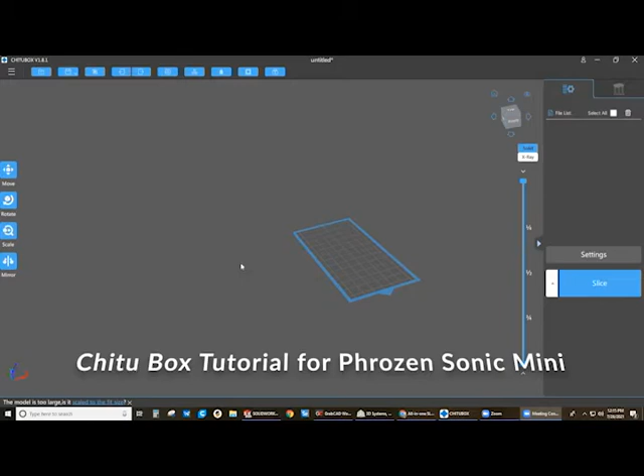Going to show how to use Chitu Box, which is the slicer for the Phrozen Sonic Mini, and then any other off-brand SLA that we get. So open up the slicer and you'll be greeted with this. From here, you're going to go to the File Explorer tab and find your files.

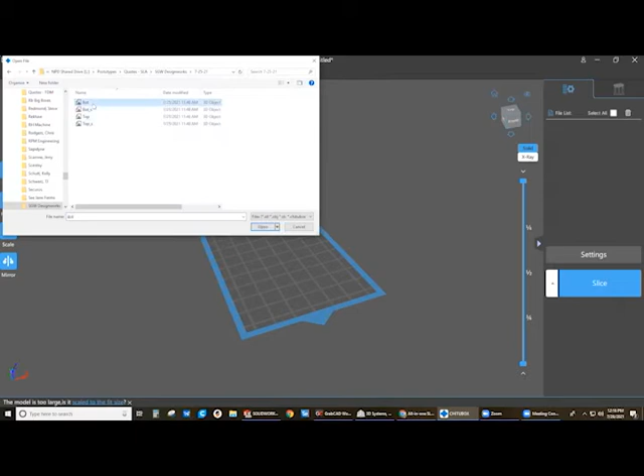Under prototypes, or where are they at? Okay. It's SLA. SW. I don't see an SGW under quotes SLA. Oh, there it is. Sorry. Okay. It's all of these. Nope. Nope. Nope. Okay. It's under a different. Oh, this one. Okay, so it's these. These two. Okay. Oof, yeah, those are small. Might as well just print all of them and see how they come out.

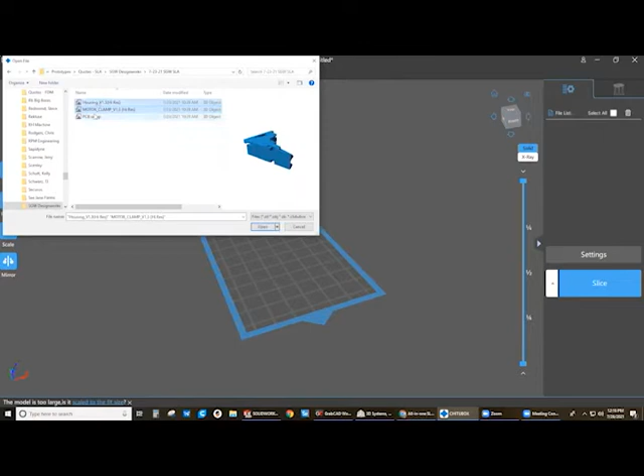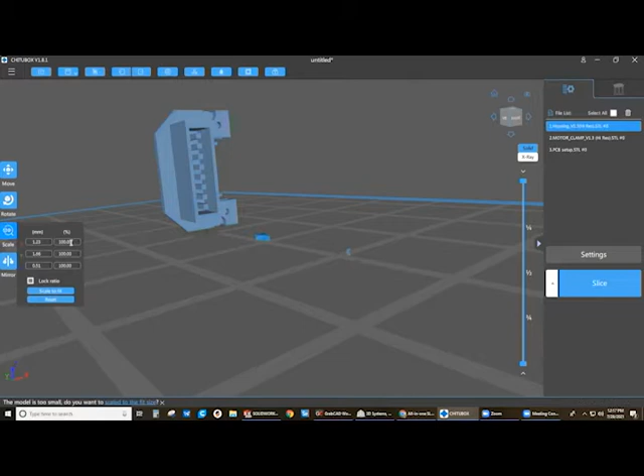So once you have them opened, okay, so for some reason, they put them in the wrong units. So if you go like this and you hit scale, you can say it'll be by 2540. Make sure that lock ratio is on. So that's just your scaling factor for inches to millimeters. So we'll get these all clipped. This one.

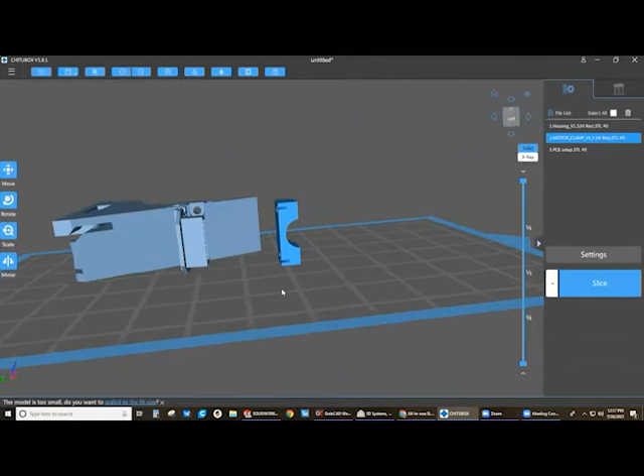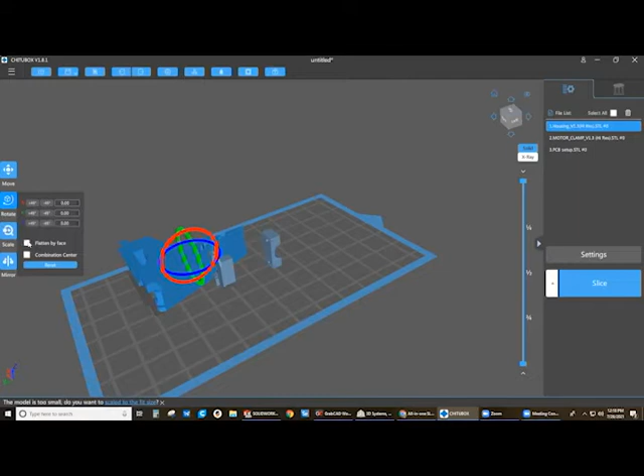Okay, so now from here, you use the right click to rotate, you hold down the mouse wheel to pan, and then the left mouse button locks onto the platform. So from here, this printer really likes to print with stuff face down or flat. So if I was going to print this one, I'd probably print it down on this face. So if you go to rotate, you can either flatten by face or you can just free rotate by these wheels, but I'm going to flatten by face and select triangle. So I'll go ahead and do that for these.

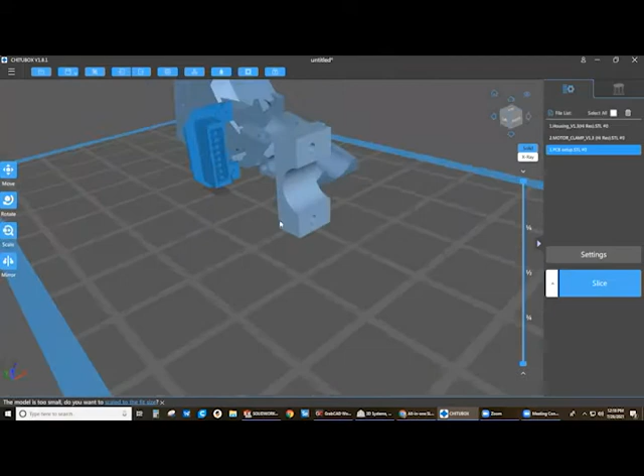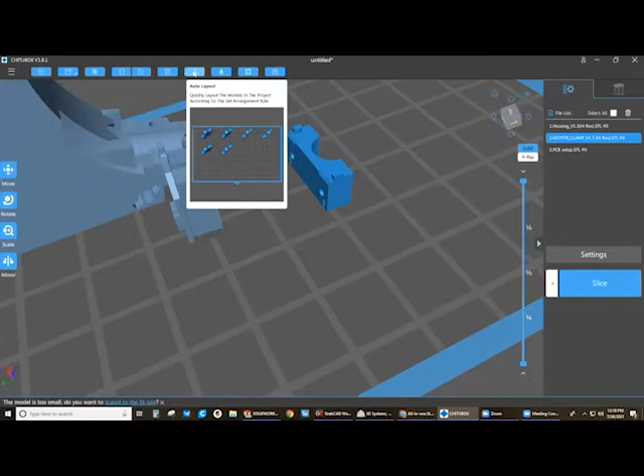I'm a little bit worried about these nubs. So if it's not perfectly flat, it's going to have a hard time printing. So for this one, I'm going to do the same thing, flatten by face, just select that face. So I feel pretty good about those two. Up here, you've got save, screenshot, like Control Z, copy if you want more than one. This is your auto layout. So if I click this, I can just go, about center. And you can set your minimum distance and everything else.

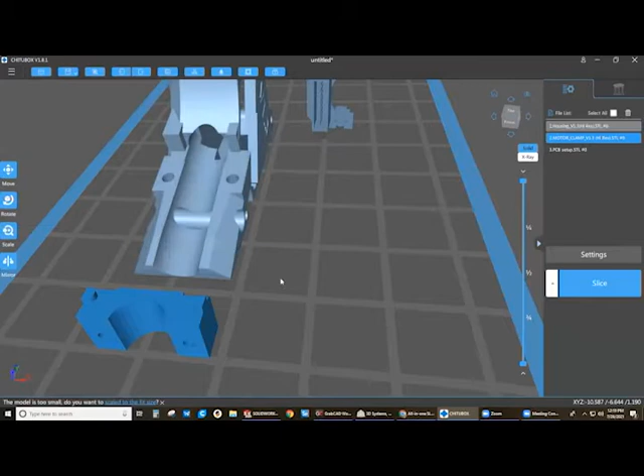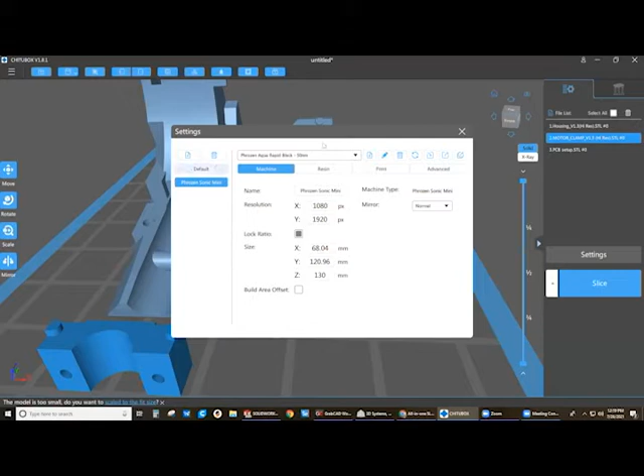Wall thicknesses, if you do want to hollow them out, just remember that you're going to have a hole in order to do that. But it does have these super cool little windows. And then from here, so this is how you get the parts in. To make sure that you're using the right printer, you'll come over here and you'll go to settings. And this is the only one that we have. This is the Phrozen Sonic Mini Rapid Black. So we just want to make sure that all of these settings are set up, and each resin is going to have its own, and then you can add different printers over here. So that's already set. We've got our parts in here.

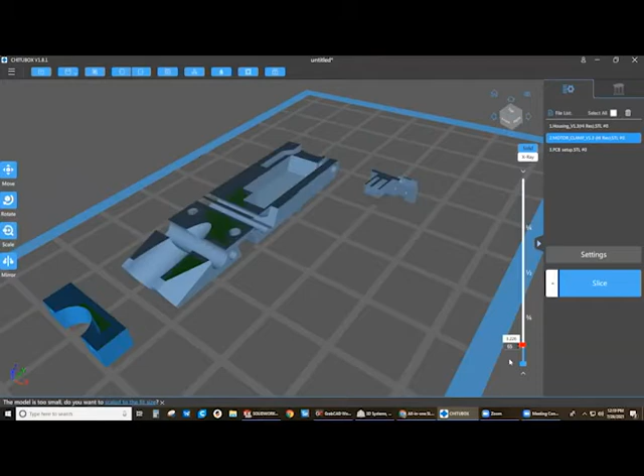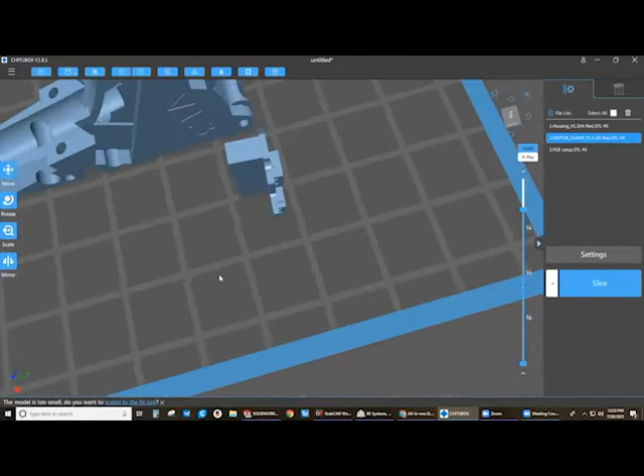These two are oriented the way that I would put them, because this one's just begging to be printed flat like this. But if we scan through these parts, you can see that anything that creates like an island would theoretically need to be supported. So like on these parts, on the two left parts, I forgot, so you can't see me pointing, we really don't have any islands that are unsupported as we work our way up. So I wouldn't put any supports on either of these, but this one is definitely not the case.

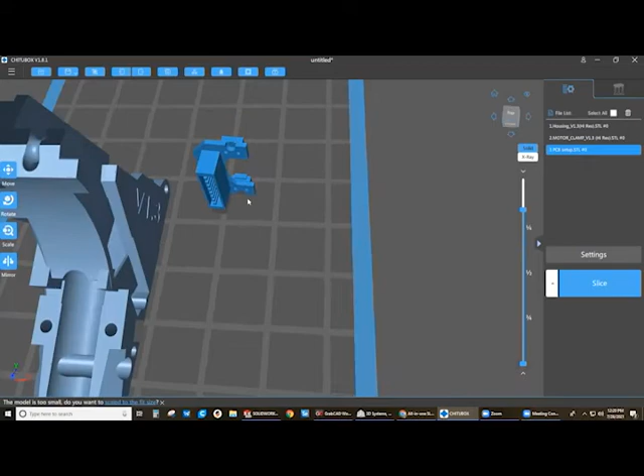So the parts on this one that are going to be really hard to print are going to be these pins on the inside here, which is insane to me. It's like they're trying to replicate, oh, I see what they're doing. They're trying to replicate a PCB is what they're trying to do. So if those pins don't work, I'm kind of not afraid. It's not going to be the end of the world if those pins are broken. And to be honest, if I wanted to make this part easier, I would just lay it flat on this face and print it without that whole connection. But they're probably trying to check fit.

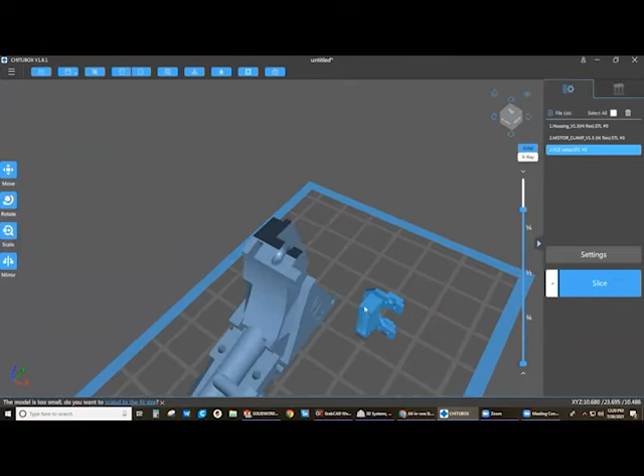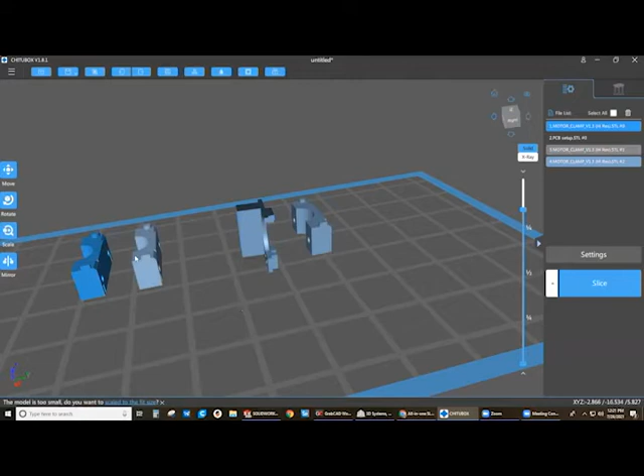So I'm going to remove this print because we already have good versions of that. So I just selected it and hit delete, and we'll just print these. So I'm going to go ahead and make a couple copies of this one. How many did they want? 3 each. So let's just make a couple more because this printer doesn't really care how many we have on here.

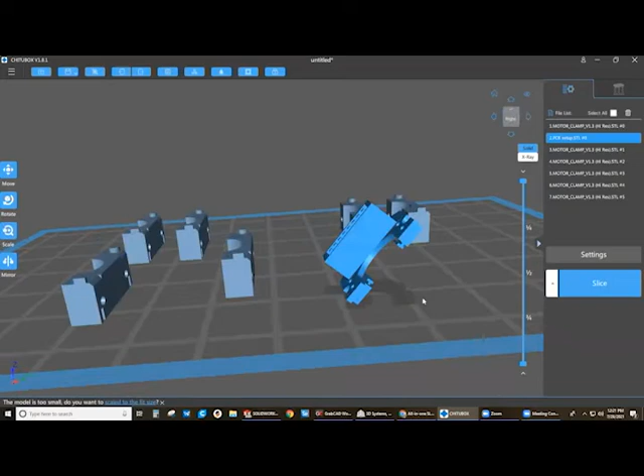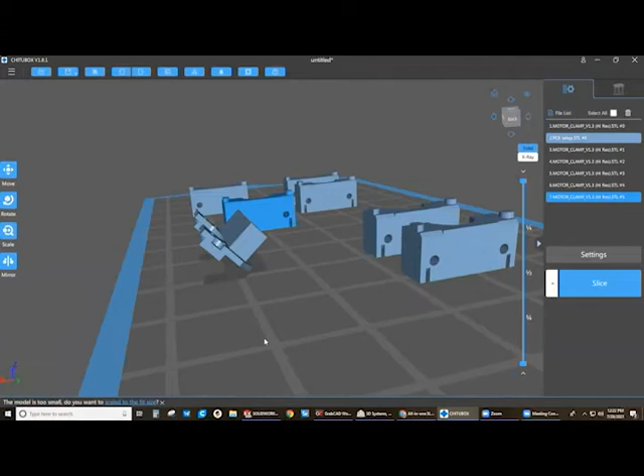So this one. So if I go like this and I click on this rotate, we can kind of see what we're faced with. Print time is dramatically affected by the overall height of the part. So if I was really worried about it, I'd want to print it as low as possible. But I think what I'm wanting to do is get it relatively flat to the bed and then rotate it this way, like this. So that way everything's kind of being built off of an angle.

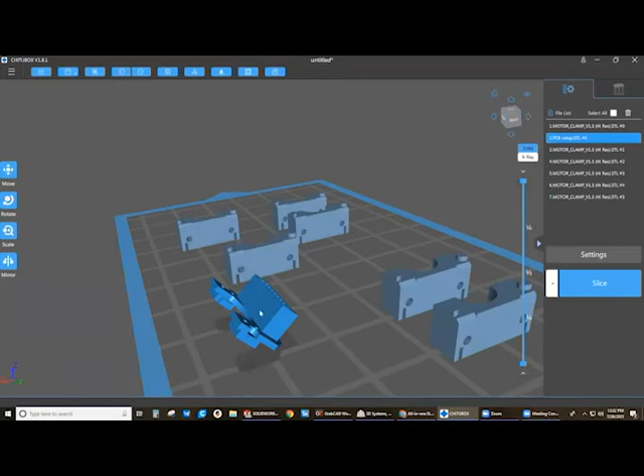And nothing, besides these little points here, is really floating. So if we go to my support tab, the support tab will work on whatever is selected. So if I go to the support tab over here, it's automatically lifting the part up in the Z, which definitely does not need to be that high, but there is a brim on here. There's like a little skate, is what they call it.

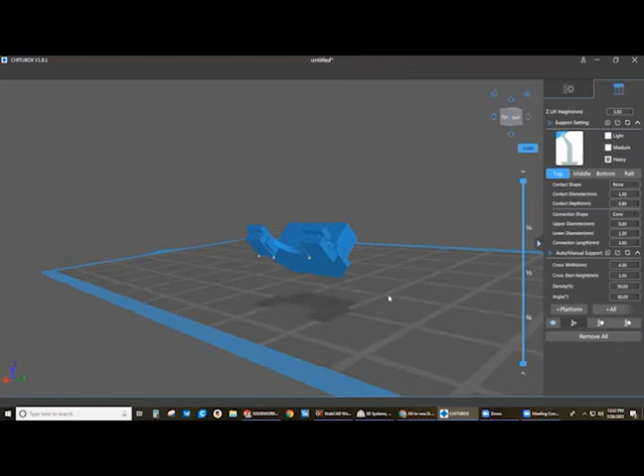So we have light, medium, and heavy settings. Always use heavy with the Phrozen Sonic Mini because of its low exposure time. But again, I'm going to just bring that as close down as possible. And I'm just going to hit all and see what it does.

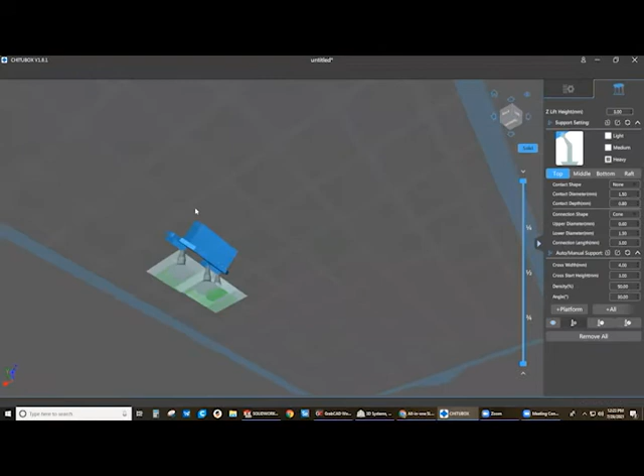So for some reason, it did not want to support anything down here at all, which is really strange to me. So what I'm going to do is go up underneath it so I can see what I'm doing. And I'm just going to select this edge and support it in a couple different places. And so it's automatically putting those skates.

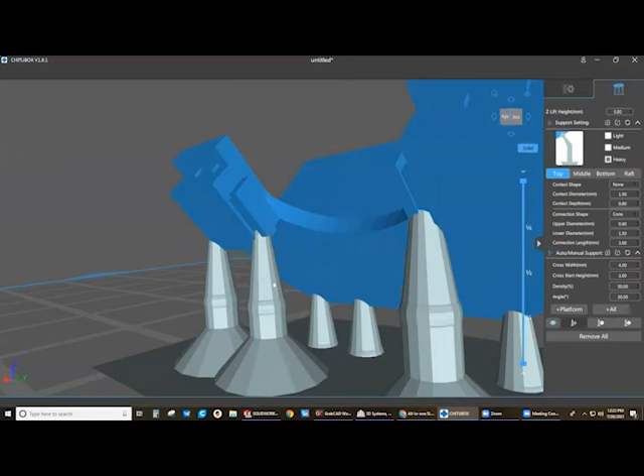And again, this is another one. So let's say I want to delete this one. I would hit over here on this delete supports, and then you select it, it turns red. And then if you deselect from that, it'll go away. So you hit select, and then you click it again and it deletes it. So I'm going to do that again with this one and delete it.

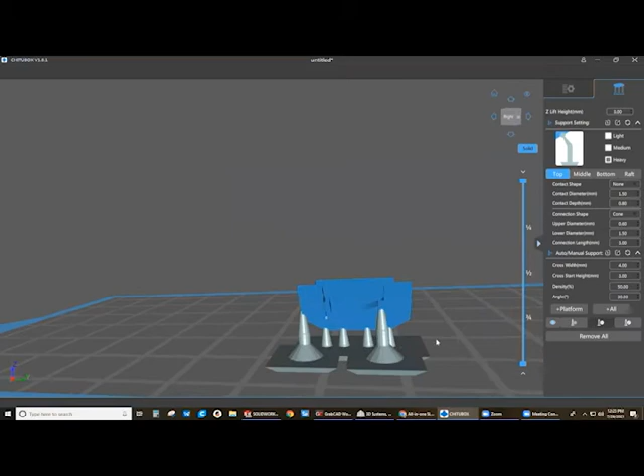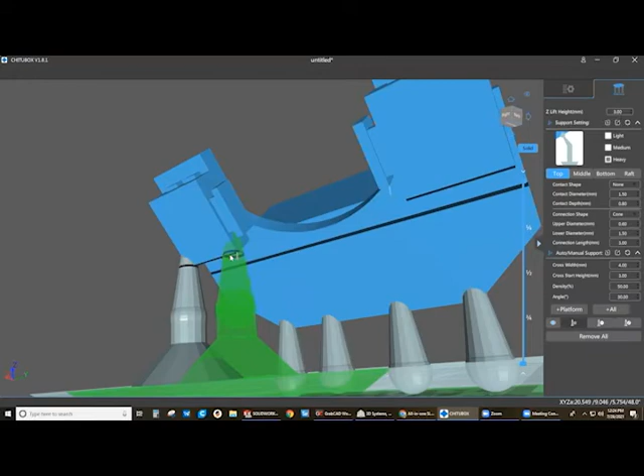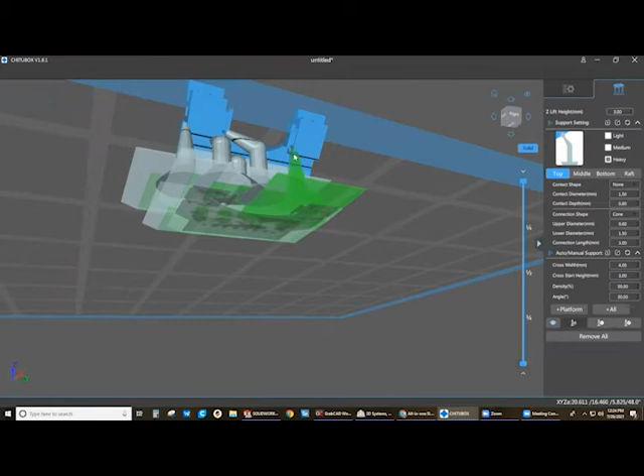So what I'm going to do here is go back to my add, and I'm going to put one that supports this point. So it's doing lots of weird stuff for me here. One that supports this point, and then one that comes off the side and supports that point. And I'm going to do the same over here. One that supports this point here and this point, and then one that comes off the center here and supports it going over that way.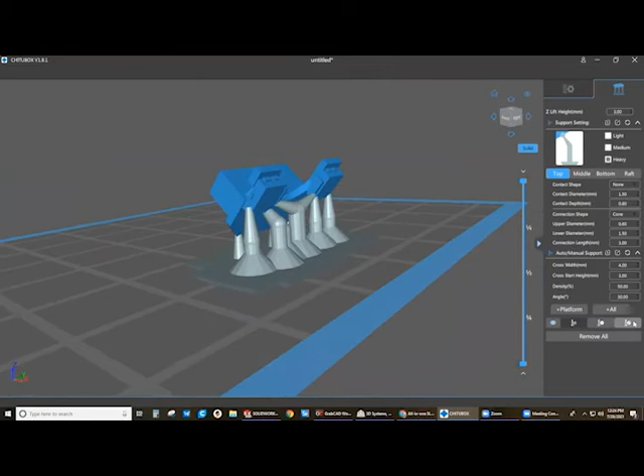It has a mind of its own, but what do you expect for a free slicer? So there you go. Kind of combine those two. And I think with the edit support, you can actually physically move this stuff in and out of the way or drag it down. But again, you don't have to get too crazy. So that's how I'd run those.

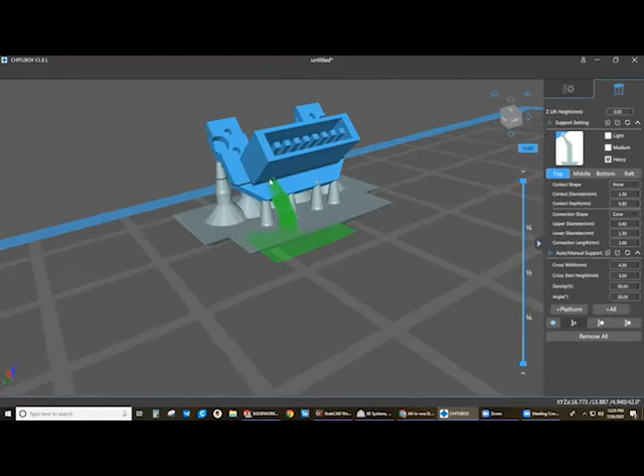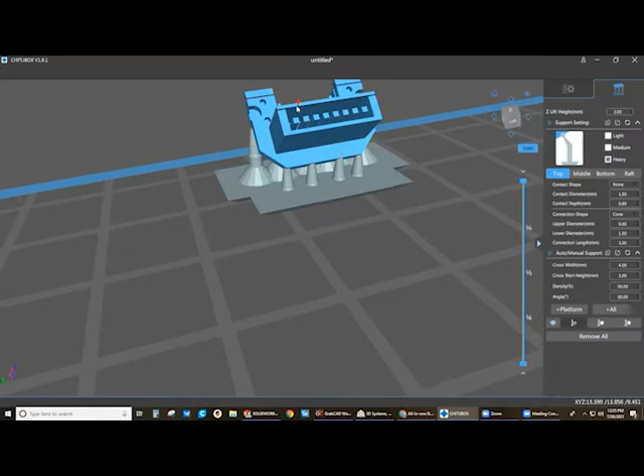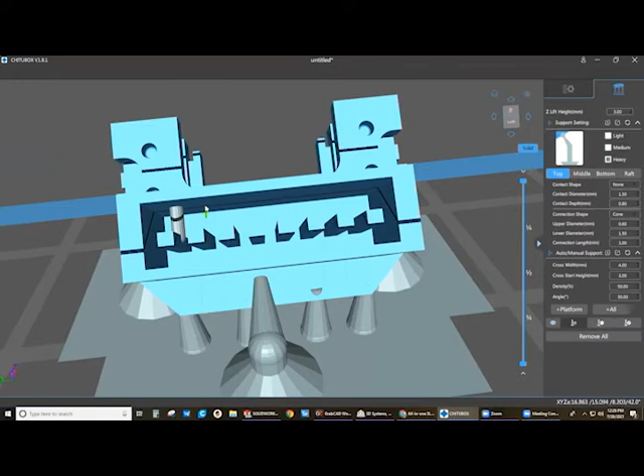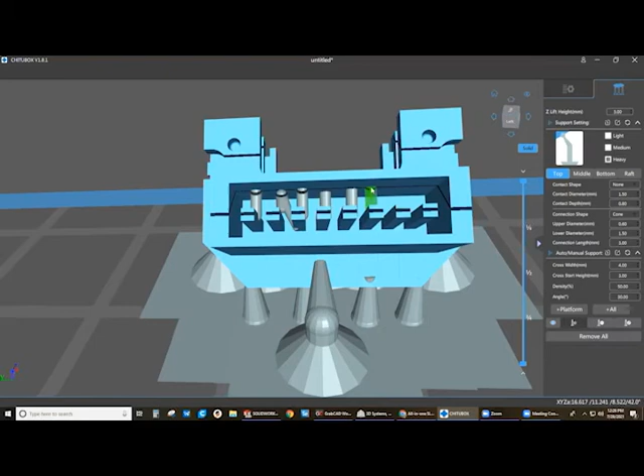If we really wanted to, we could zoom in on this and try to add some supports in here. What I want to do is put in one of these little guys. For some reason it will not let me. It's trying in some spots. You can see it kind of glitch. So it's trying to work here. I don't know why it's having such a hard time letting me put these in here. Need to delete that one.

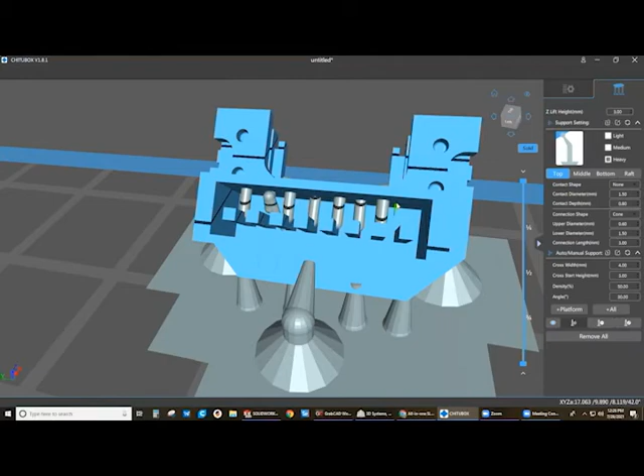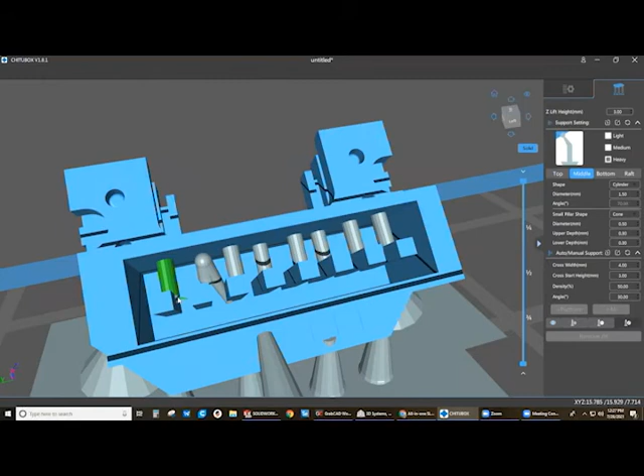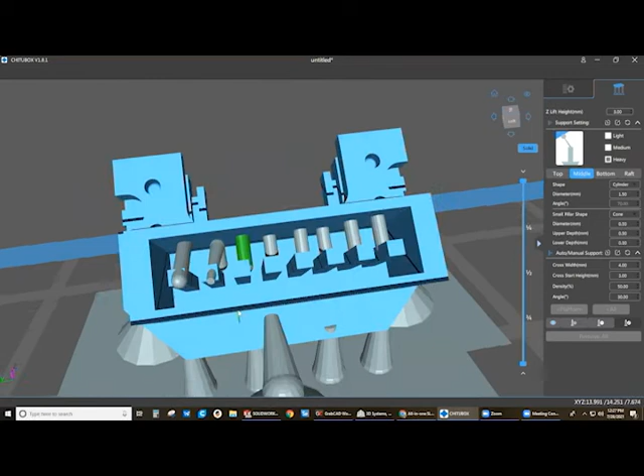So basically what I wanted to do is just help support those from free floating. And so if I go in here, I might be able to edit them. Looks like I can drag these around. Maybe I just do something like that. Just gradually work my way up. Basically, I just want to do those tips so it has something to grab onto.

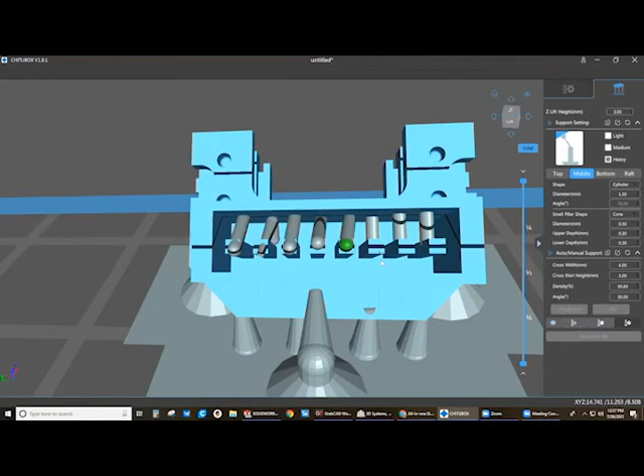Does that make sense, Andrew? Mm-hmm. Okay. I know this is tedious, but this is such a tiny part. And the reason why I'm doing this before I copy it is because once I copy it, it will hold on to these supports for my copies as well.

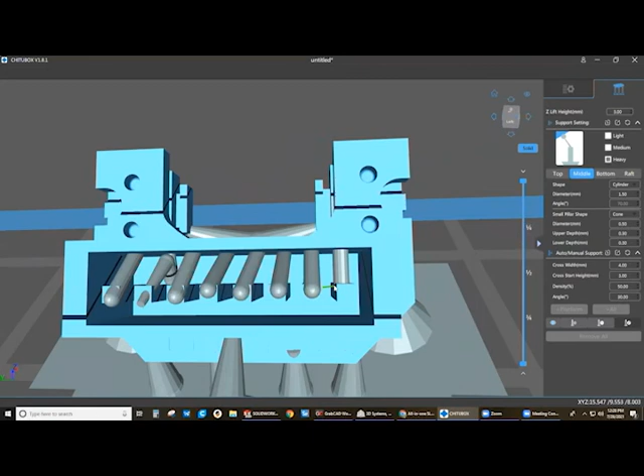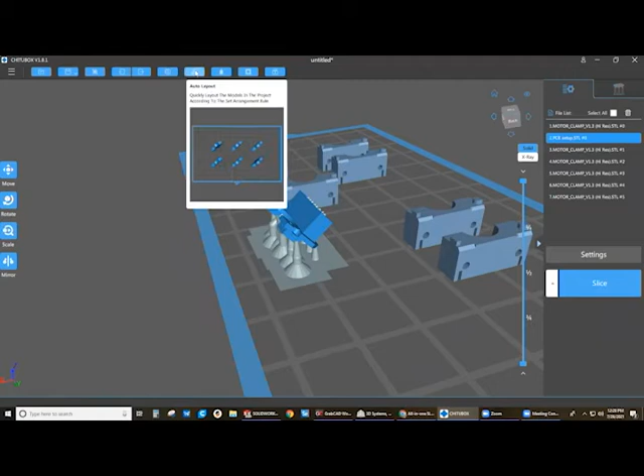All right, so we'll leave that like that. I'm going to remove this guy. And I feel pretty good about that now. That's going to be the best chance it has. So I'm just going to go back to here and do my auto layout again. And then I'm going to add my copies. Put one extra one in there, and then we'll auto layout again. Okay. So we've got the copies, got everything in there.

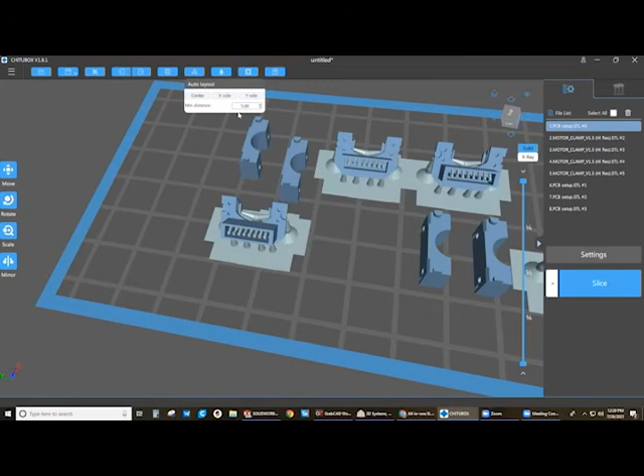I'm actually going to delete these extra ones. Really no need for them, because I think we have a couple of them already. Center. Why would it do that? Center. So once you have everything where you want it, you can hit slice.

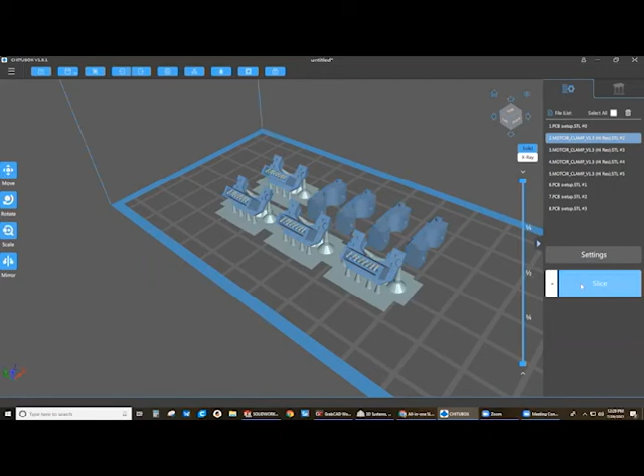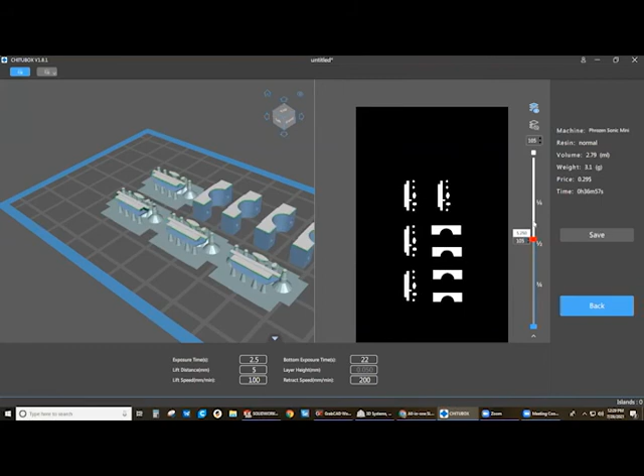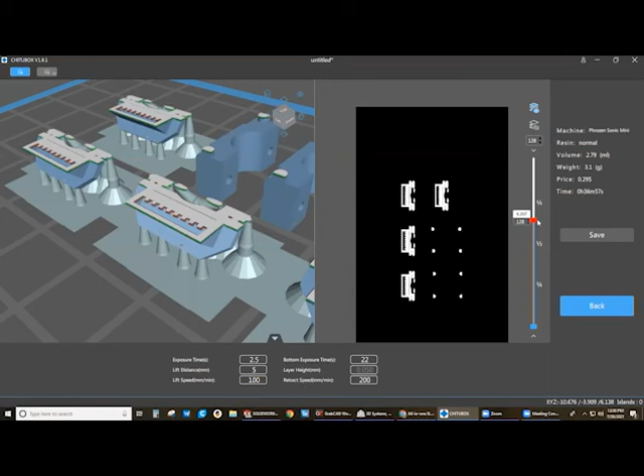What this does is give you a preview of what's happening as you work your way through. Those red areas are showing areas where it might have a harder time. So if we go back up here and look, I don't want to play it, I just want to scroll. So it's saying that those overhangs might be an issue. But I don't want to put any more supports in there necessarily. I guess I could put some. I think it'll be okay.

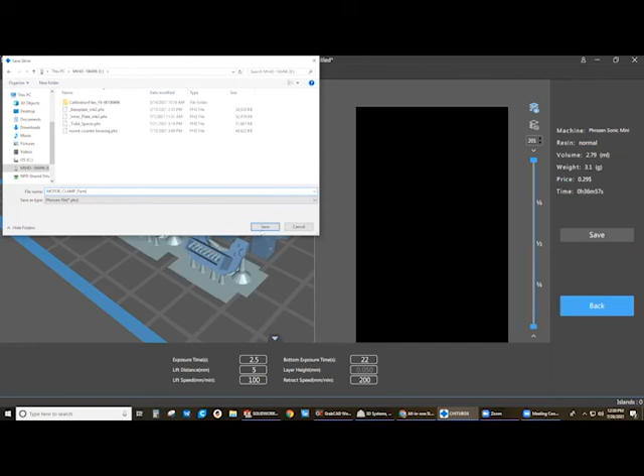Okay. So now that it's all sliced, it's going to be a total of 29 cents worth of material. It's going to take 36 minutes to print. And we're going to save to the flash drive, and we'll just say motor clamp parts. Save it to the flash drive.

And then you'll go over to the printer and plug the USB drive in. It's on the back left-hand corner of the printer. You'll hit print, select the preview image of what we got. And then from there, you can see this is only 2 milliliters of resin. So there's most likely going to be enough resin in there for everything, but never fill the tank over between half and 3/4, because the platform actually drops into the tank. So that will obviously raise the material up when it drops in. So just make sure of that, and that's it.